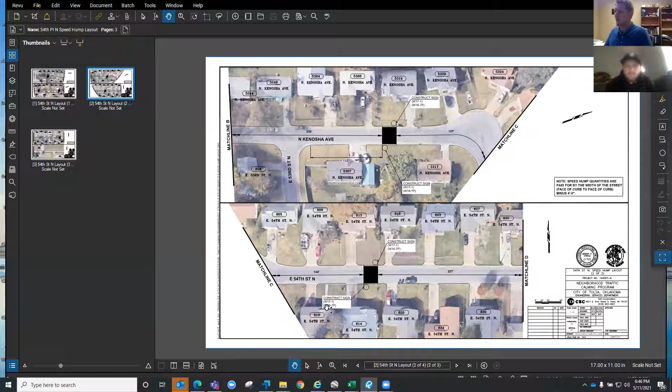Moving to our next sheet, we have another speed hump just north of East 52nd Street North. Then we hit this cul-de-sac as it runs to the east on 54th Street. We have a speed hump 144 foot away from that match line, basically about 150-some odd foot away from the cul-de-sac. Then proceeding further east, we have one more speed hump between Madison Avenue and Norfolk Avenue, and the speed humps terminate at that point.

Further to the east, between Peoria and Norfolk, are some commercial properties, so we will not be installing any speed humps through that. Now I'd like to share with you what these speed humps look like.

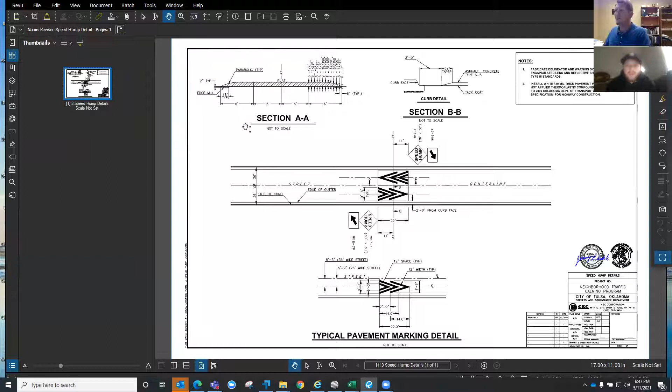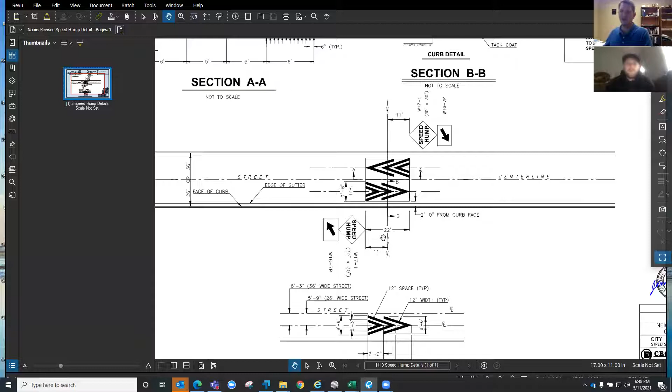As you can see in the center area, these speed humps are 22 foot long, and they are marked with chevrons. The black is actually a white marking. We have speed hump signs at each corner where you can see it approaching from both directions, with a little arrow pointing downward. The reason for these signs is to help motorists know of these speed humps and exactly where they begin and end. Also, an advantage of having these signs is that if this is a snowplow route, the snowplow drivers know where these speed humps are, so they're able to make adjustments with their snowplows.

As far as what these look like, in the top left corner is an elevation view. They're parabolic at the entrance and exit from the speed hump, and they've got a little over a 10-foot long plateau. So these are not quick speed humps. They're pretty long, but they allow a nice smooth transition for vehicles driving. You can easily drive 20, 25 miles per hour over these in a typical street legal vehicle and not scrape the bottom of your car or have issues like that.

Every vehicle rides a little differently over it. Some pickup trucks might react a little differently than smaller cars, but I've driven over a lot of speed humps in various different vehicles, and they ride very, very nicely.

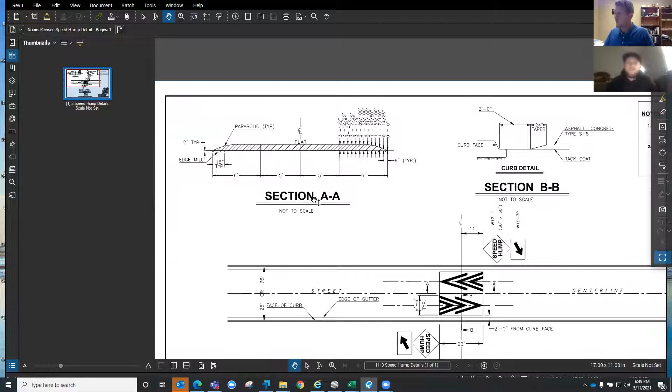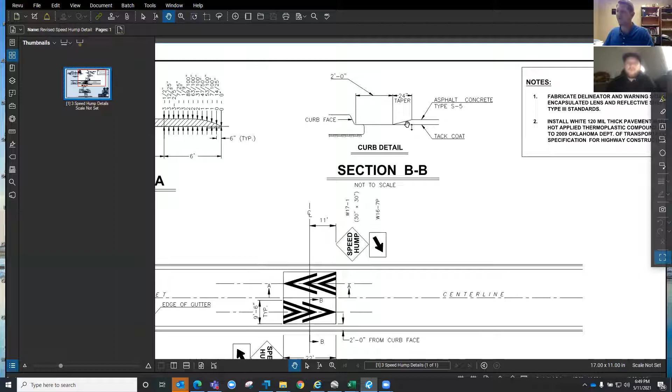One more thing I'll point out: the speed humps typically start 2 foot from the face of the curb. You can see in this section BB, they start 2 foot from the face of the curb, and then they have a little 24-inch taper up to that plateau. The reason for this is it will allow bicyclists, if they are riding on the street, to not go over the speed hump, they can go along here. But more importantly, it allows drainage flow to cross and navigate by these speed humps, so we do not want to block any drainage from the street.

Again, these are the pavement markings shown from both directions. They're highly visible, they'll be white, and with the yellow speed hump signs, you'll be able to see these very well at night and make sure you can make adjustments. They are very effective at slowing speeds. We typically do a post study once these are installed, just to see how this affects the volumes or the traffic speeds.

And generally it brings the speed down a few miles per hour. In every situation where we've put these in and done these tests, we have not had one exceed 5 miles per hour over the speed limit. So they've done a good job in reducing and mitigating speed.

The funding source for this project is the Improve Our Tulsa 2 issue that was voted on back in November of 2019. Money was set aside for this project, and as a way of extending our tax dollars, the city of Tulsa will be using their own maintenance staff to install these speed humps, and they do a very good job of it.

We're typically able to get 6 speed humps for the same cost it would take to pay a contractor to do it. The reason is the city staff and equipment are already paid for under the standard maintenance budget, so the dollars we're spending go into material costs, which allows us to construct a lot more speed humps through this program.

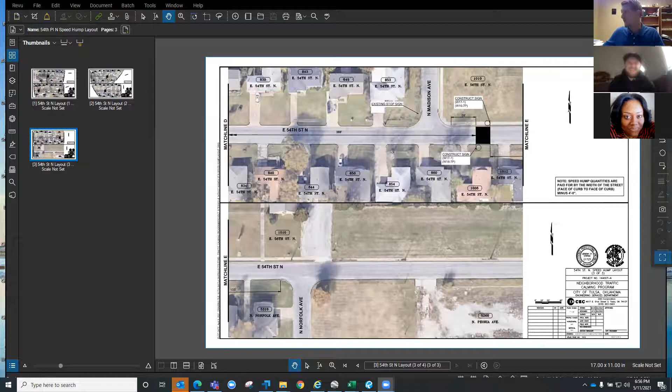They are, in fact, 22-foot long speed humps. This is our speed hump detail, right here in the center, and it's 22 feet long. So the ones you've seen, that you'd call big, that's what they are.

They're not terribly tall, only about 3.5 inches tall, but they're very long, and they're effective at slowing cars down. Yet at the same time, you can drive over them at 20-25 miles per hour without losing a wheel or an axle.

In fact, if they're constructed well - my kids are getting older now. When I started this program, my son was only 5 or so, and he thought they were fun. The closer they were together, he thought it was like a roller coaster. He'd say, 'Daddy, let's do that again.' He won't do that anymore now that he's 11, but it was fun while it lasted.

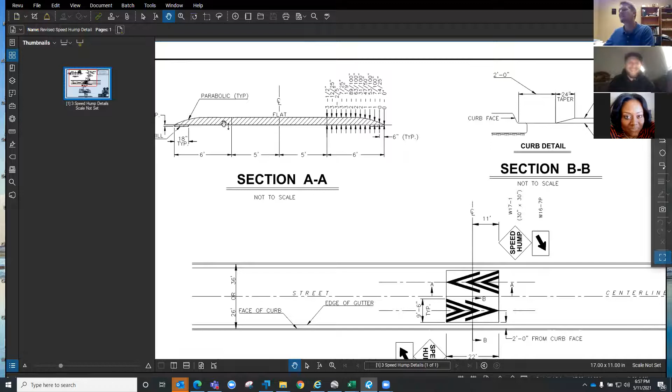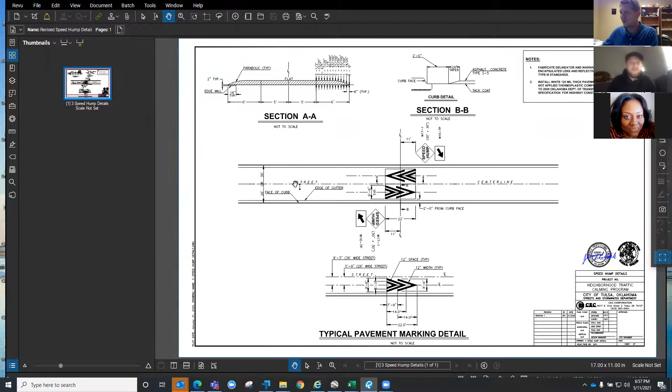So on 54th, the question I wanted to know is how many will we actually have on this street? Let me open this up. I do not know what happened - I think it had to do with me calling this full view, and when I did that, I somehow lost my other files. It's frustrating why that is the case. Let me just see here and go to the first page.

Starting at the south end, you can see every one of these big black boxes are the speed humps. On this first sheet, we have 3 speed humps. On the second sheet, split more or less where the cul-de-sac is between Kenosha Avenue and 54th, we've got 2. On the last sheet, we have 1. Altogether, we've got 6 speed humps from 54th Place North all the way to Norfolk Avenue.

So you said on 54th Street, you have how many? I'm sorry, I meant it starts at 51st Place North, going north on Kenosha Avenue. From there, as we cross at that cul-de-sac and go on 54th Street North, we've got altogether 6 speed humps - 3 on this sheet, 2 on the second sheet, and 1 on the third sheet, between Madison and Norfolk.

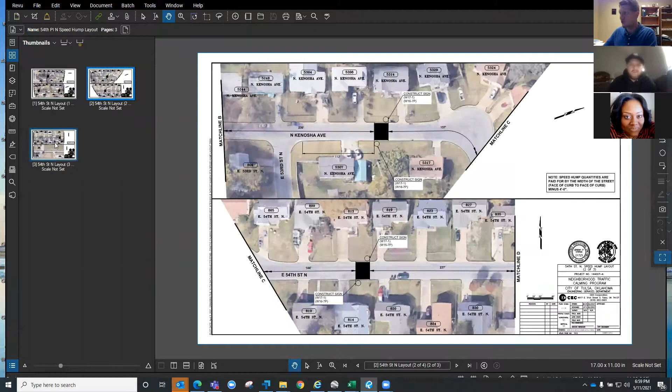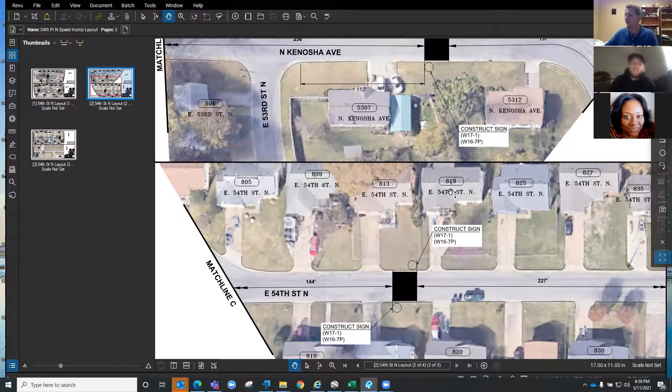Sure. And where they are at, we do have street addresses on these. These rectangle things, those are the street addresses. So if you were to go out there and see where these homes are, this one is in between 813 North, or 813 East 54th, and 819, splitting those drives is where that first speed hump is on 54th Street North. And then further to the east, we have it about 39 foot from the end of the radius from Madison Avenue. Those are the 2 speed humps we've got up there.

We didn't push any further to the east between there and Peoria because it's commercial properties and there's no need. Gotcha, that makes sense. Okay.

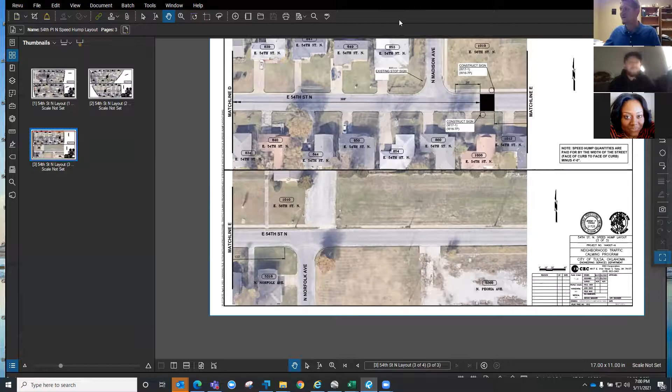Did you have any questions? I'll just check with my husband, see if he had any questions on anything.

We appreciate your work on this, and I know this process has been going on for, well, going on 3 years, so we're glad we're at this point finally. Yeah, this is my second time putting it in, so this is altogether about 6 years. So 3 years at a time, and then the first time I did it.

Excellent, excellent. Well, I appreciate the follow through. I know it's quite a process. It takes time, and then the petition process is difficult, having to go around and meet your neighbors and get people to sign. I know it's quite an effort to do that, so I appreciate the efforts you've moved forward with. Appreciate your guys' help and patience and just everything, the assistance.

You're welcome, it's all part of it, it all works together. Absolutely, absolutely. We enjoy working with the city on this program. I think out of every project I've ever worked on for the city, it's probably been the most enjoyable, just to know what an impact it has on people's lives.

Oh, yes, these cars, getting these people that are using your residential neighborhood as a drag strip and getting them to move out of there and go somewhere else. And I know it pushes them to another street, but at least they're not on your street, and that's the important part for you and your family. Yes.

Absolutely. Well, do you have any other questions? Actually, I don't, I think that's about it for all I can think of. Just look forward to seeing this process move forward. That's where I look forward to.